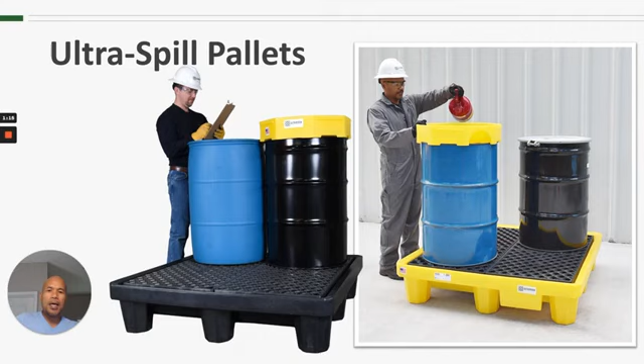And then the black one pictured on the left-hand side is the economy model. The Ultra Spill Pallet P4, or the standard model, is rated at 6,000 pounds weight capacity, and the 4-drum economy model is rated at 3,000 pounds. You'll notice that we have UDL next to those weight capacities. That stands for uniformly distributed load. You need to make sure that any weights on these spill pallets are uniformly distributed, or they may not meet those published capacities. They are 100% polyethylene construction. I will touch on that in the next slide. And they are able to be moved with a forklift or a pallet jack from all four sides.

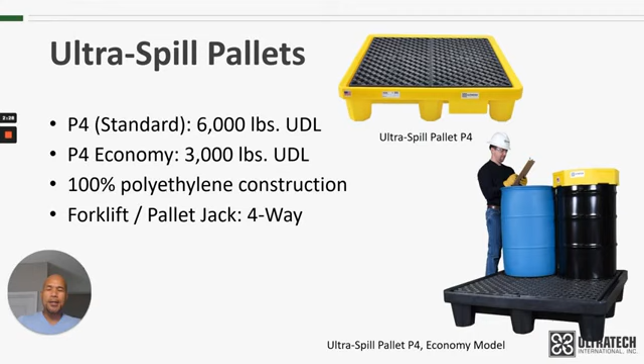The 2-drum versions, the standard model is rated at 3,000 pounds. The economy model is rated at 1,200 pounds. Again, those are uniformly distributed loads. And they are 100% polyethylene construction. We use polyethylene for our rotationally molded products for a number of different reasons. But some of the main ones are, one, that they will not rust or corrode. And two, they have excellent chemical resistance. With the 2-drum models, they are also able to be moved with a forklift or a pallet jack, but it is just two-way entry for those.

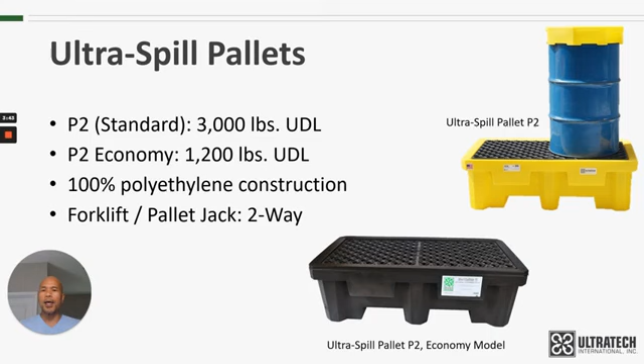As far as containment capacity goes, all of the spill pallets have 66 gallons of containment. So the 4 drums, both the standard and economy, have 66 gallons, and the 2 drums also have 66 gallons of containment. You can see from this picture that the 2-drum spill pallets are considerably taller than the 4 drums. The 4-drum pallet is just under 12 inches tall, and the 2 drums are around 17 inches tall. So they're significantly taller, but that's what we needed to do in order to get that containment capacity.

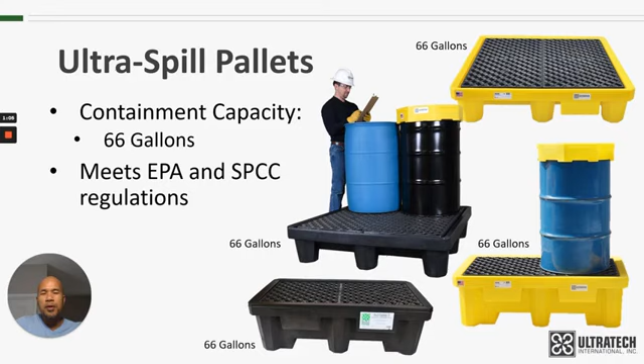At 66 gallons, all 4 of these meet the EPA regulations. They actually exceed the regulations for 55-gallon drums, and they also meet SPCC regulations and requirements. I will put a link down below in the description to a video that explains those regulations in much more detail.

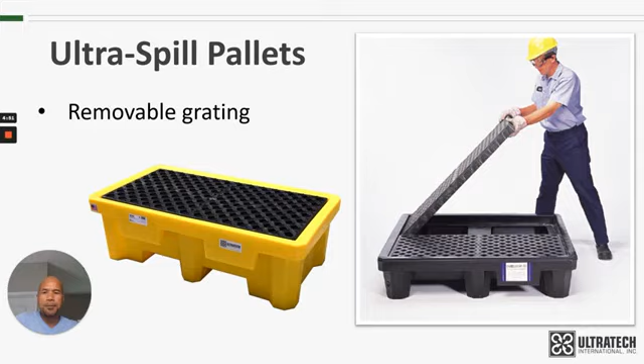All of the spill pallets have a removable grating that makes it easier for cleanup and inspection. You can see from the right-hand picture, the 4-drum model has 2 pieces of grating, and the 2-drum model on the left-hand side has a single piece of that same grating. The cross of life is a safety feature that we have on all of these spill pallets. I will put a link down below in the description for a video that helps to explain the cross of life in more detail. But essentially, it's a safety feature that prevents the sidewalls from being pushed out too far.

Options for all these spill pallets: we have a pullover cover. This can be used either for storing drums outdoors, or if it's a dirty or dusty environment indoors, it can help to keep the drums and the spill pallet clean. There is also a drain available. It's a 3/4 inch drain plug that's installed at the factory. This can be helpful to remove any spilled contents that are collected inside of that containment sump.

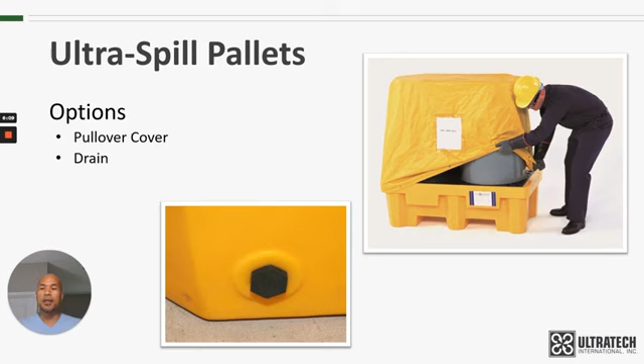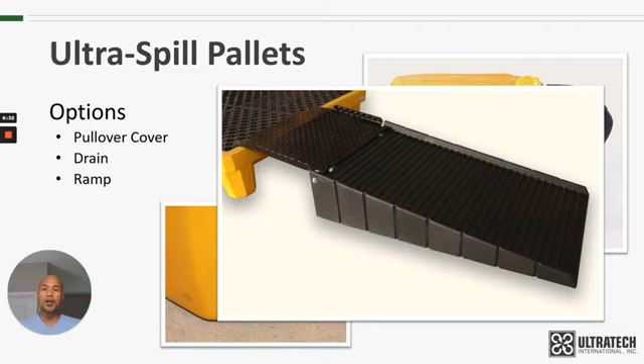We also have a ramp available. Keep in mind that this ramp works only with the 4-drum models, either the standard or the economy, but will not work with the 2-drum spill pallets. As I mentioned earlier, those are very tall spill pallets, and a ramp is just not practical with that kind of height.

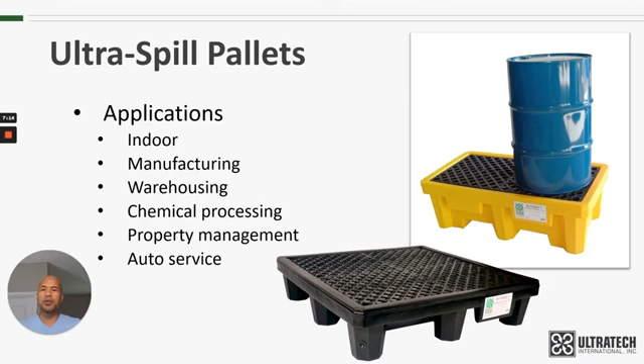As far as applications where you might use these spill pallets, typically they are going to be indoor applications. That can be manufacturing, warehousing, chemical processing, property management, auto service. That's just a few of the applications where these could be used. Really, any place where there's a 55-gallon drum is a potential application for these spill pallets.

What else do you need to know? As far as the economy models go, they are made with the same exact mold as the standard spill pallets. So the dimensions are exactly the same: length, width, height. All the little nooks and crannies in that mold will be the same from the standard spill pallet to the economy model. What's different is that we use a recycled or regrind resin for the economy model versus a virgin resin with the standard spill pallets. That means the economy model is less expensive.

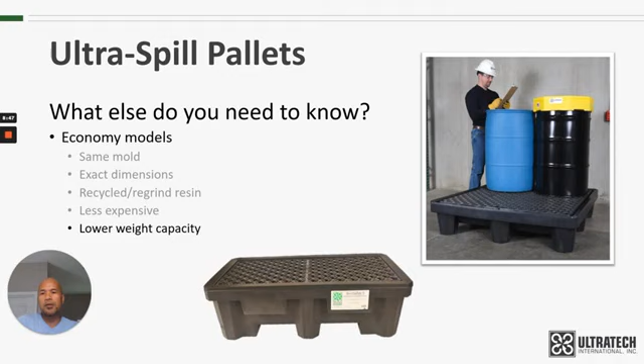It also means with that recycled or regrind resin that it has a lower weight capacity. It's not as strong as the virgin material. So as I mentioned, we were talking about weight capacity. The 4-drum standard model, for example, is rated at 6,000 pounds. The economy model is rated at 3,000 pounds, so half of the weight. Just keep that in mind when you're comparing pallets.

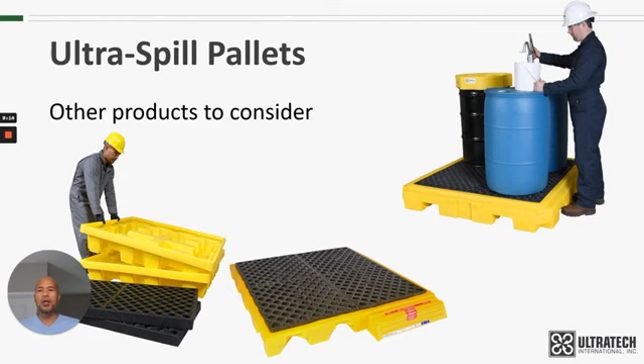Other products to consider. We have a number of different drum spill pallets available. We've got something that's even lower profile. If that's still too high, we have spill decks, which are under 6 inches tall. We have nestable spill pallets if shipping or storage is a concern. We have outdoor versions of these spill pallets for storing drums outside in the elements. And if plastic's not what you're looking for, you want something that's steel, we have those as well.